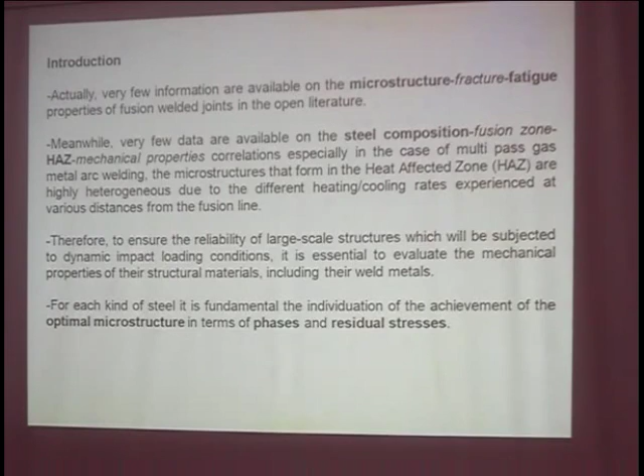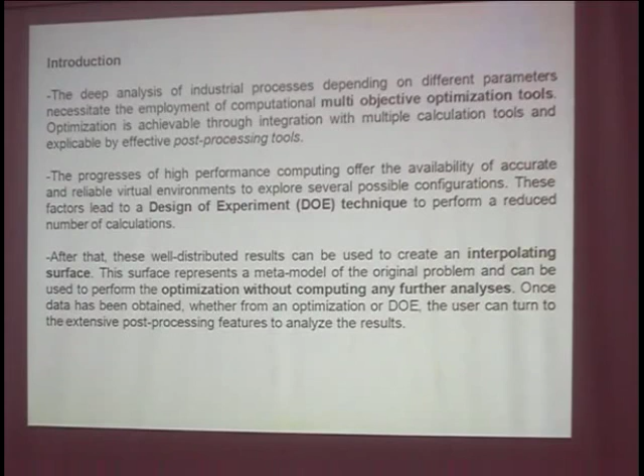In this way, we are able to compute such data through a multi-objective optimization tool, which trains on the job and gives us additional information on the ways to optimize properties in terms of microstructural evolution, increasing tensile strength, fatigue, and impact strength. This makes it possible to have enough data to design precise experiments and optimize the situation for each kind of steel, or globally, depending on the final goal of the study.

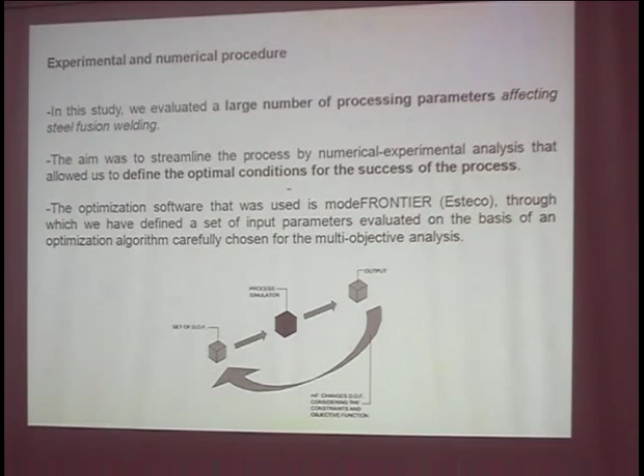The instrument we employed in these studies, Mode Frontier, is a commercial tool which permits us to study a lot of processing conditions and gives us as output many mechanical and microstructural data, allowing us to analyze a large number of experimental data.

This goes toward the optimization of the mechanical properties. The number of experimental data we analyzed is 600 experimental conditions in terms of different thicknesses, different input, different voltage and current during the welds, covering 600 data points for tensile properties, fatigue, and impact strength.

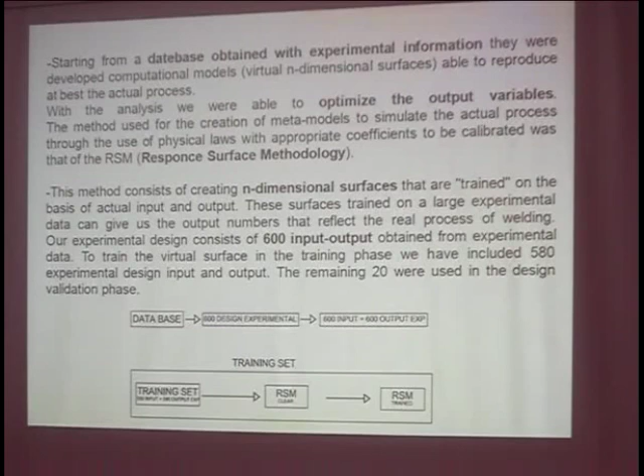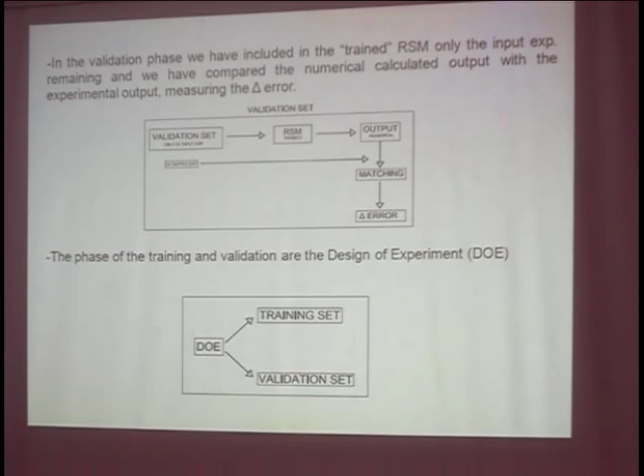580 were employed to train the system, and the remaining 20 were employed as validation for the final properties of the material. This way it's possible to train the response surface obtained through analysis of the input and output experimental data, and correlate it to the remaining 20 properties via a delta error, which gives us the goodness or not of the analysis we perform.

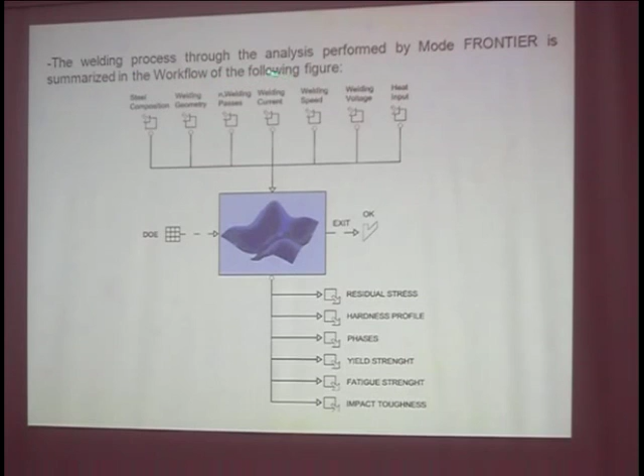This is the workflow used by Mode Frontier. The welding process is divided into a lot of input parameters in terms of weld geometry, the thickness of the weld, the angle, the number of passes—which strongly influences the final properties of the welds—the welding speed, the welding current, the voltage, and heat input.

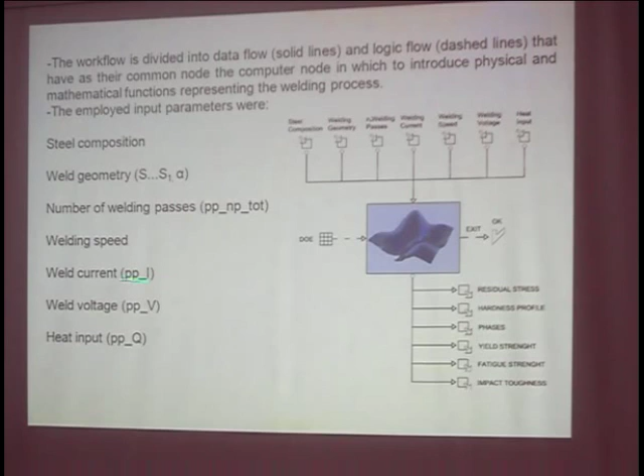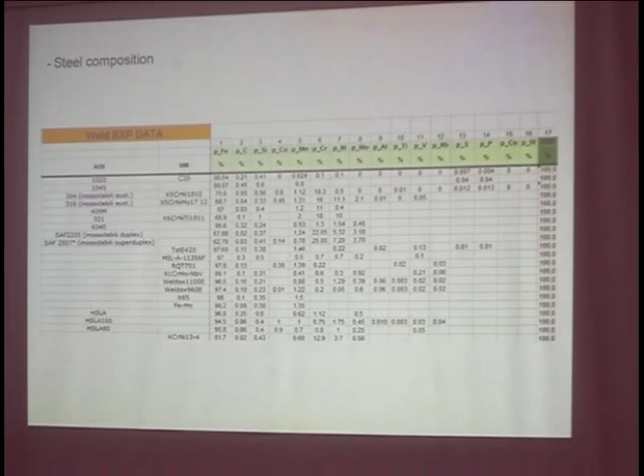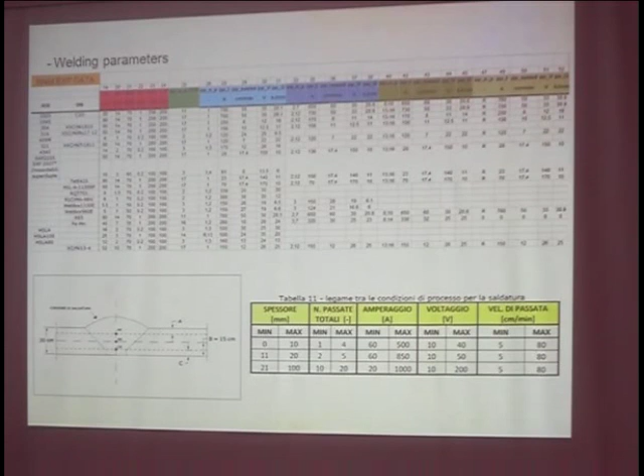Here you can find the table of the different input parameters we employed in terms of thickness, from a couple of millimeters to 80 millimeters, the angle, the total number of passes, and for each pass or group of welding passes, the different input parameters in terms of current, speed, voltage, and heat input. This work has been done for all the welds. These are the output.

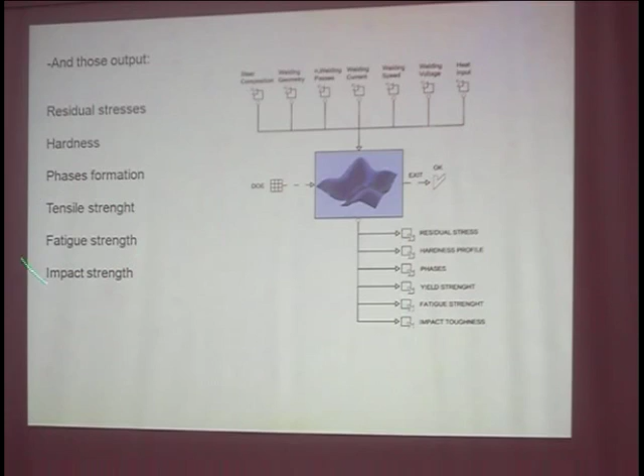We measure the residual stresses through X-rays, hardness profile, and phase formation, always through X-ray measurements, and sometimes where the data was not so clear, through microstructural observation via optical microscopy, tensile strength, fatigue strength, and impact strength, all at room temperature.

In different zones of the weld, depending on the thickness, we measure the residual stress and micro-hardness profile. For bigger welds, we measure in 3 sections the residual stress and micro-hardness profile, while for thinner welds we measure just in the middle of the weld.

Here we checked the microstructure in terms of martensite start and finish formation, bainite, pearlite, ferrite, and austenite, taking into account the same points in which micro-hardness and residual stress were measured.

In this way, we are able to check point by point the evolution of microstructure and mechanical properties of our welds. And here we measured the tensile properties, fatigue, and impact strength with respect to the base metal resistance in this case.

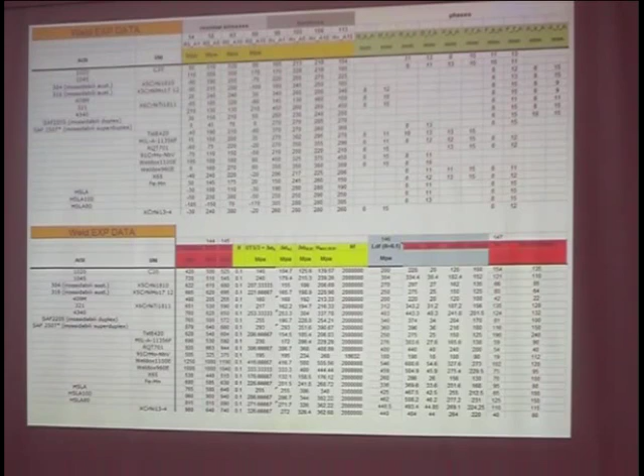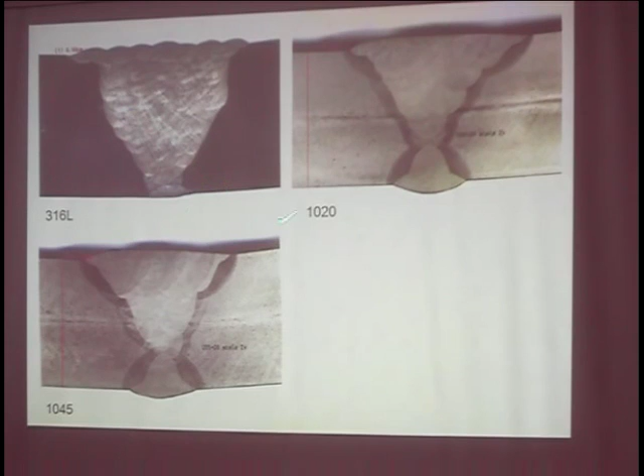Here you can find an example of the bigger welds we studied. These are almost 80 millimeters in thickness, 316L, 1020, and 1045 steel.

Now the first results to be analyzed were the global ones. So we tried to give the behavior of the output in terms of all the data belonging to our investigations, in order to give a general law and a general way to be followed to optimize the welds and the consequent mechanical properties.

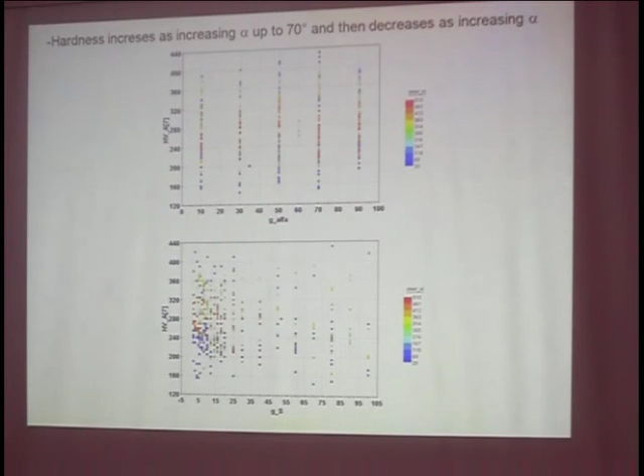In particular, we found that hardness increases with increasing the angle of the weld up to 70 degrees, and then decreases as the alpha angle increases further.

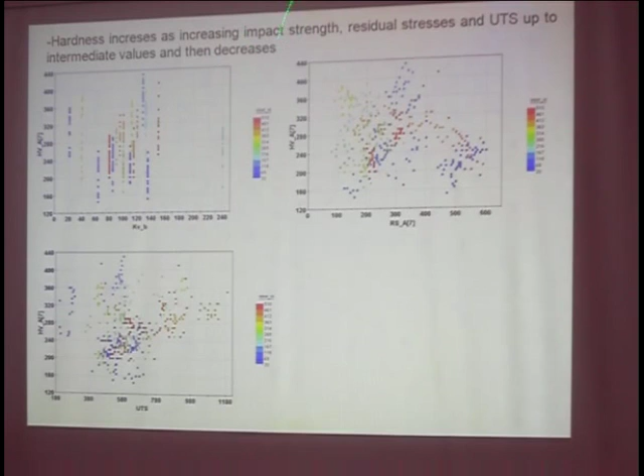Hardness increases as impact strength, residual stresses, and ultimate tensile strength increase up to intermediate values, and then decreases. For the impact strength, it increases with increasing angle and voltage, and then decreases as the welding passes increase.

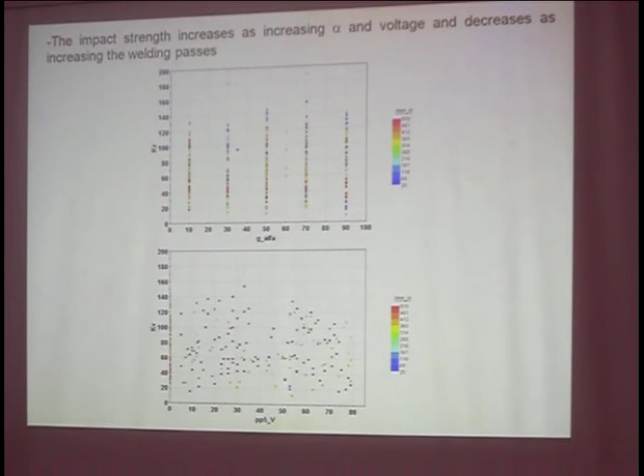The number of welding passes is strongly important in the weld's behavior because the thermal history of the material and the transformation history are strongly related to the number of passes and the heat input at each pass.

The impact strength we found is optimal for intermediate values of yield strength and ultimate tensile strength. This means that if you need very high tensile properties, you won't have optimal values in terms of impact strength.

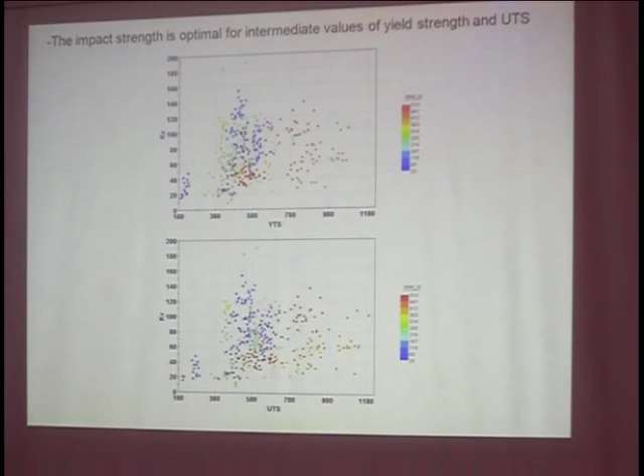And here you can find the so-called correlation matrix. This is the global correlation matrix in which are described the correlations between all the input and output parameters in terms of weight.

In this way you can find that for each single point you want to analyze, you have the weight on, for example, residual strength, yield strength, impact strength, and so on. This allows many investigations, such as the weight of heat input on fatigue limit, or the weight of heat input on residual stress profiles, and so on.

And you can do this for all the experimental data you have available, or for each single steel you want to analyze. So it is a very fast and very useful instrument to understand what is going on during your experimental evaluations.

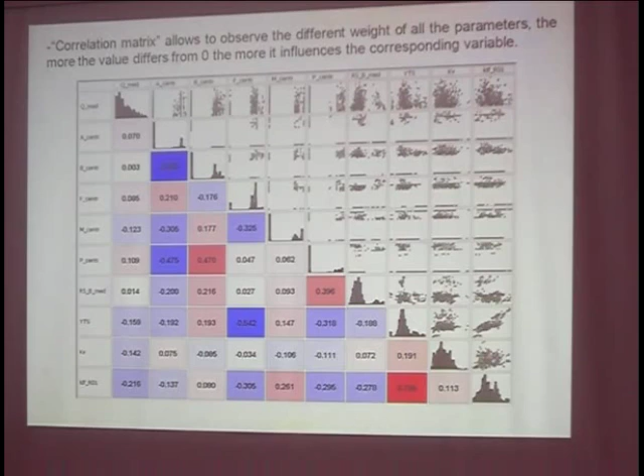And here you can find some examples for some single steels, because after the global evaluation, we focused on each single steel that optimizes each single situation.

Focusing on mechanical properties for AISI 304 and Weldox 1100, the highest values are in correspondence with low and intermediate heat input. For higher heat input, you have a strong decrease in mechanical properties.

For AISI 321, the optimal is intermediate heat input. If you have a very high or very low heat input, mechanical properties decrease strongly.

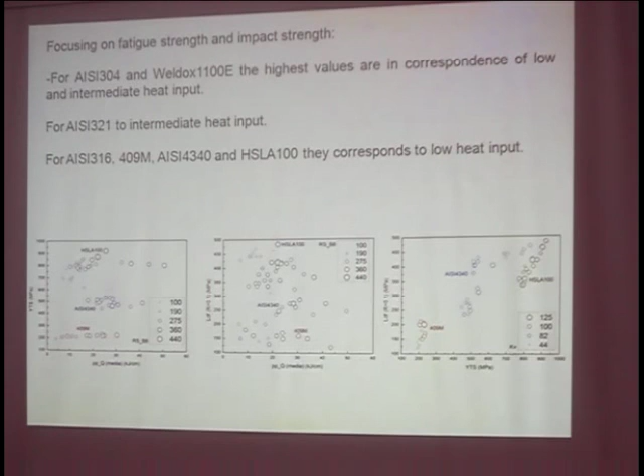And for AISI 316, 409M, 4340, and high strength low alloys, they correspond to low heat input. So you find very broad, different situations. For each kind of steel, you have a very broad range of processing conditions to be employed, and very different processing conditions for optimizing the mechanical properties.

For example, for AISI 1020 and 1045, both fatigue limit and impact strength increase with increasing residual stresses.

So if you are able, compatibly with the geometry of the structure, to have an increase in residual stress for this kind of steel, you strongly increase the impact strength and the fatigue limit. For AISI 304 and Weldox 1100, both fatigue and impact strength are high across a very broad range of residual stresses, so they appear not much influenced by residual stresses.

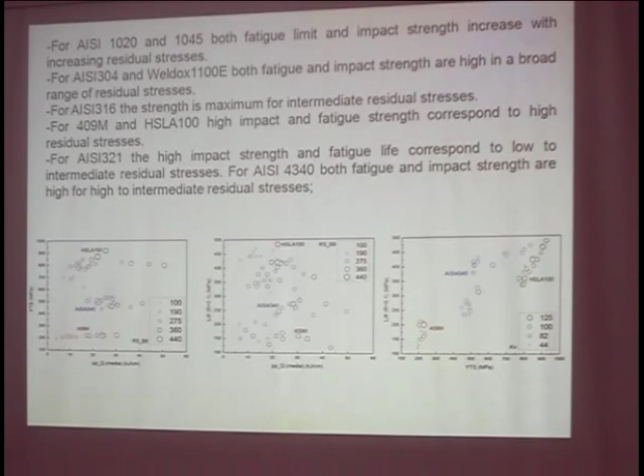AISI 316 strength is maximum for intermediate residual stresses. For 409 and high strength low alloy steel, impact and fatigue strength correspond to very high residual stresses. For AISI 321, impact strength and fatigue life correspond to intermediate residual stresses, while for 4340, both fatigue and impact strength are high for high to intermediate residual stresses.

Finally, we tried to correlate the mechanical properties back to the input parameters, optimizing the input parameters to achieve optimization of mechanical properties by taking into account the microstructural evolution, because the microstructural evolution of such steel welds is strongly influenced by the situation in the microstructure.

For example, for AISI 1020, 1045 and 409M steel, the welds show the best fatigue limit and impact strength for a ferrite-martensite rich microstructure. So if you are able through your processing parameters to induce just a ferrite microstructure, ferrite-martensite microstructure, you have the optimal situation in terms of mechanical properties.

For stainless steel, it is difficult to relate to microstructure evolution, because it is always the same. For AISI 4340, the best fatigue life corresponds to martensite-ferrite microstructure, while good fatigue life and high impact strength correspond to martensite-ferrite-austenite microstructure.

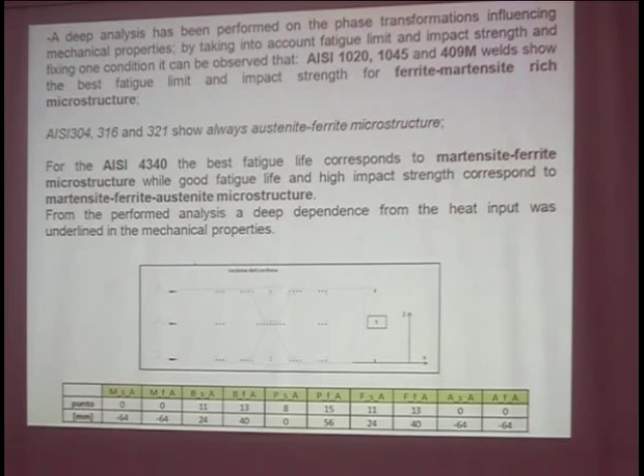So you have to choose if you want just the best fatigue life, not taking into account impact strength, or if you want good behavior in terms of both fatigue and impact strength, in which case you have to induce a very different microstructure through your processing parameters.

And we found finally, because you have to indicate a macro parameter in this evolution, you have to say, okay, I want just this weld through this heat input, and so you fix all the processing parameters during the weld. We found that for AISI 1045 and 4340, the best fatigue properties and high impact toughness are experienced for low heat input.

For 304 and duplex 2205 steel, the same behavior follows. For high strength low alloy and MIL-A-11356F and so on, the best correlation between impact and fatigue strength is in correspondence of intermediate heat input, and in this way it was possible finally to identify the best processing conditions for the optimization of both mechanical and microstructural consequent evolution in our steel.

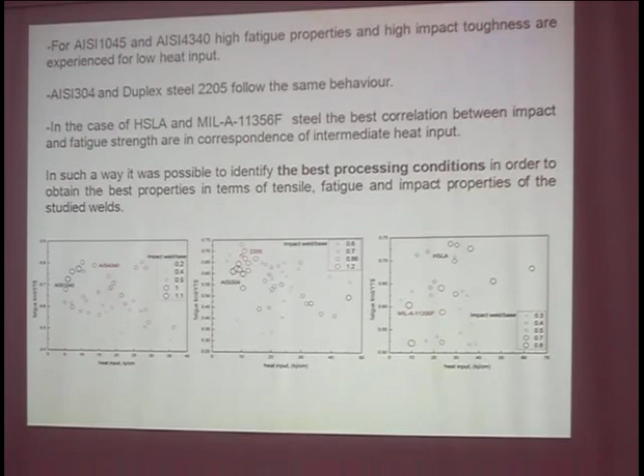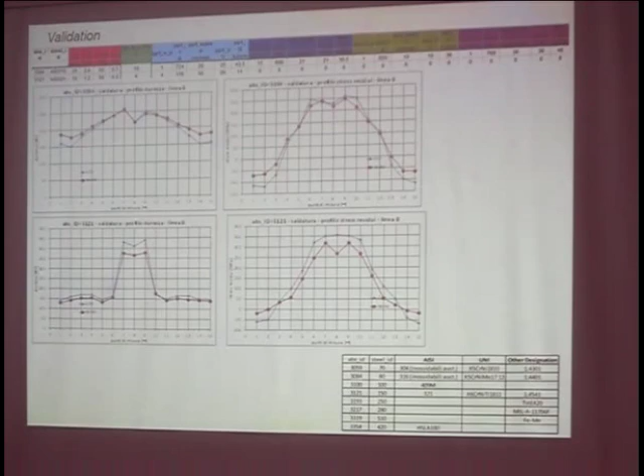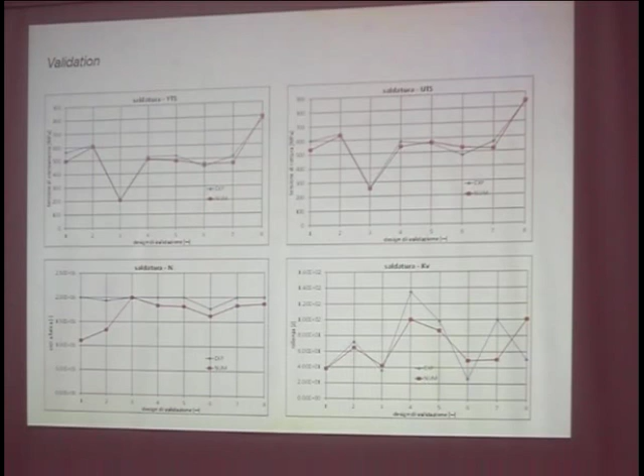These are in terms of micro hardness profile and residual stresses profile, and these are in terms of mechanical properties, yield strength, ultimate tensile strength, fatigue life, and impact toughness.

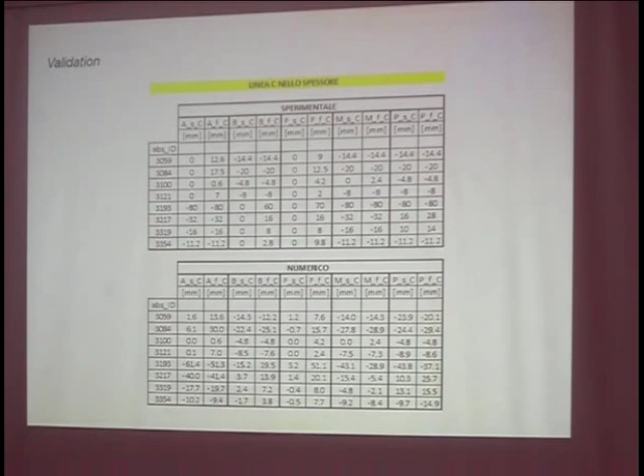For the microstructural evolution, the system doesn't work so well in terms of prevision of the evolution. This means that just for this kind of work, the system needs much more experimental data to be trained in order to be more precise on the final evolution of the microstructure, because it's very complex - martensite, austenite, pearlite, and mixing of two or more microstructures - and so it becomes very difficult.

In conclusion, this way of working allowed us to build a very big database on many different kinds of fusion weld, gas metal arc fusion weld for steels, and it is an instrument which is open, so it can be improved in its performance on the job.

So you introduce new data, and it works much better, so it's an open database, and it allowed us to have a good previsional tool for the mechanical properties, and we are working on achieving an optimization in terms of the prevision of the evolution.